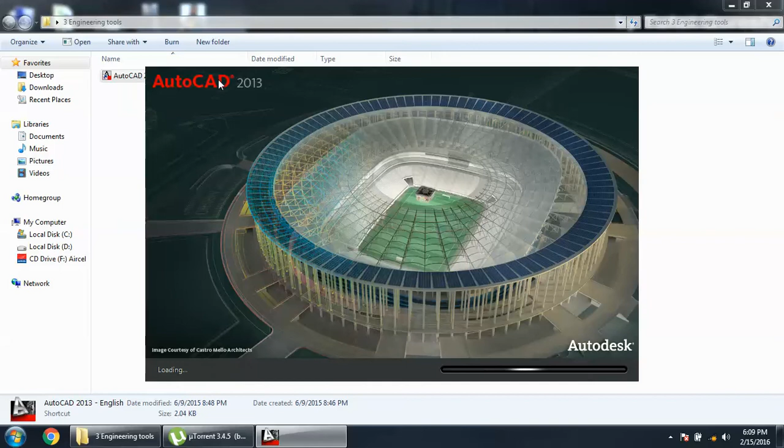Today we're going to design a 33 kV pin insulator, a very rough design, not accurate, just to give an idea how we can proceed. We know a 33 kV pin insulator has three insulating discs stacked on top of each other, and then there's a top groove which holds the ACSR conductor.

So first of all, when we open AutoCAD, it will be in a two-dimensional mode, 2D mode. So we go here in the settings down below, click it, and click on 3D modeling, and it soon comes into the 3D mode. This is the 3D mode, in which we will make a three-dimensional pin insulator.

First of all, we will have to make a reference line. Before that, here is the command window. We'll type a command for the units we want to select, UN is the command for units. We click and enter, and get the different units - inches, feet, millimeters, miles. We will keep it in inches, a reasonable way, in the decimal system, in degrees for angle and length, and then we click OK.

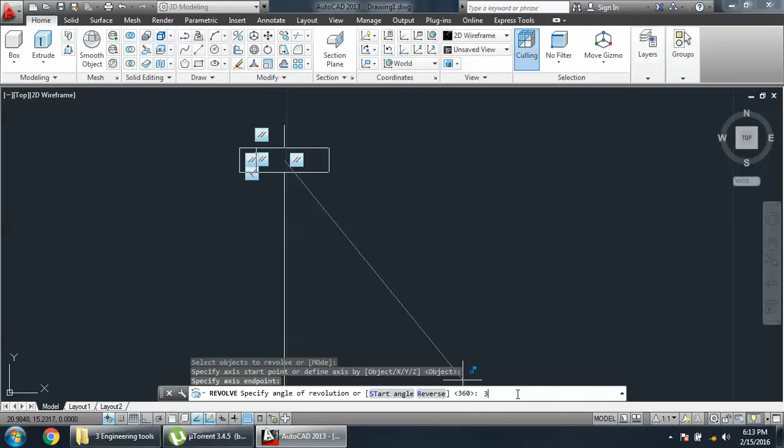After pressing enter, it will ask you to give the reference axis around which this disc has to be revolved. We click around the axis that we have already made, like this. So it will revolve, and it asks the angle, like 360 degrees. We enter 360 degrees, and this becomes a disc, a rounded disc.

So in order to visualize the disc, we go here, and here's the orbit command. We click it, and we see this is in the form of a disc. Alright, so we'll go back to the top, back to where it was.

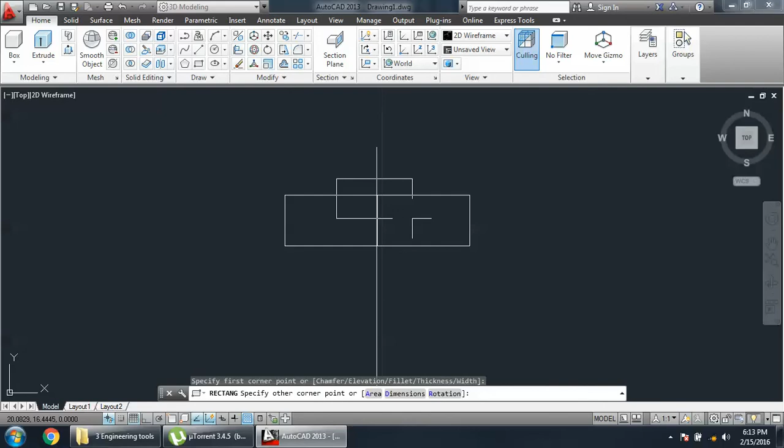In order to make a proper groove, we will cut through this disc for the grooving, to make the groove on which the conductor will rest. So we'll make another rectangular shape like this - half of it will be submerged on the disc.

We'll rotate it a little bit, get into the orthographic view a little, hold it like this. So what we'll do is go for the extrude command.

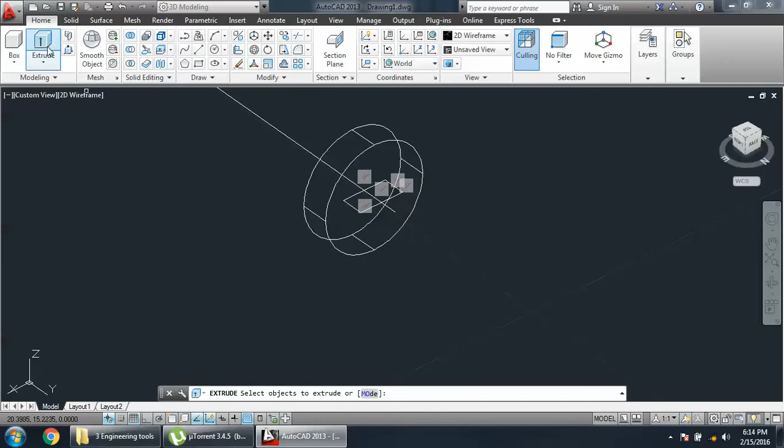This is the extrude command. Once we click extrude, we click on this object, okay, and we enter it. It will extrude outwards, project outwards.

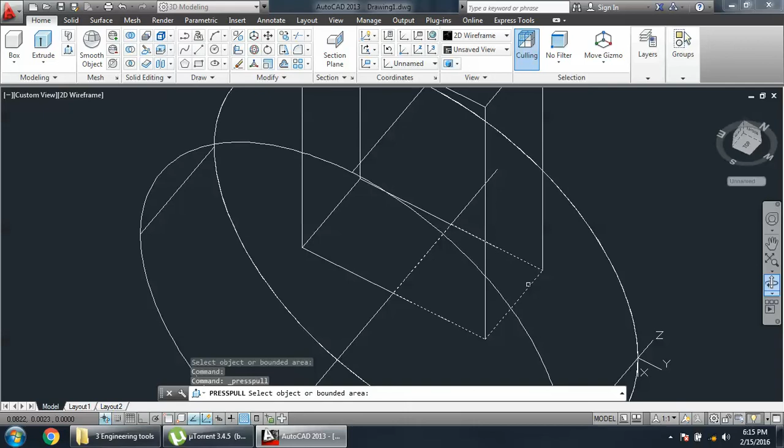Then we have another tool called press pull. What we'll do is select the particular face that we want to press pull, and move it on the other side like this. So we press pull at this face - here we go, it's not getting selected right now. Okay, no, we want to select this for press pull. It goes out, projects out, and then again we select this surface - yeah, like this surface should get selected.

Okay, this surface gets selected and it goes out of this. So what we have to do is subtract, in order to make the groove, we have to subtract from the whole disk this portion that goes through and cuts across the disk. It's a solid disk, so in 3D.

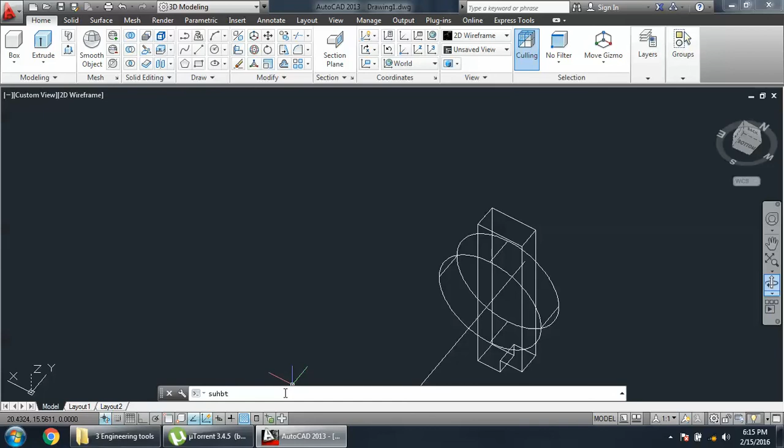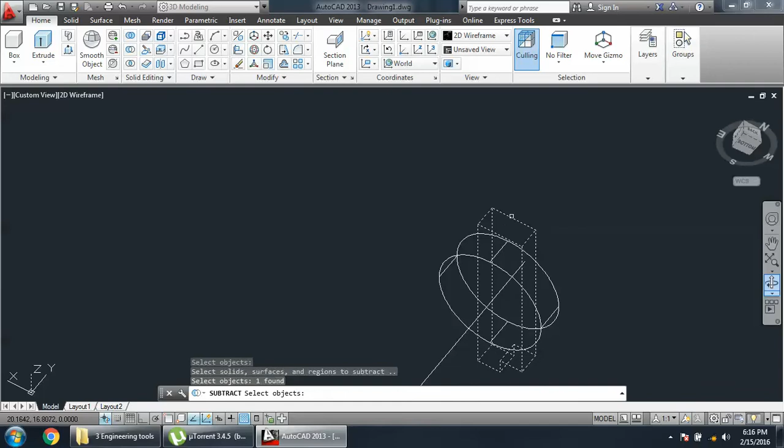So what we'll do is type the subtract command, and we have to subtract from this disk this portion, and we will enter. Let's see again, subtract. We type the subtract command. We will have to select the object, and from this object we will select this object and press enter, and so this groove is done, on which the conductor would be resting.

So we'll keep it again straight around the reference line. Now what we have to do is make the discs underneath it. So we make the insulating parts underneath it. What we will do is select the straight line. It will be somewhat like around this, depending upon the design, and then it will go a little downwards.

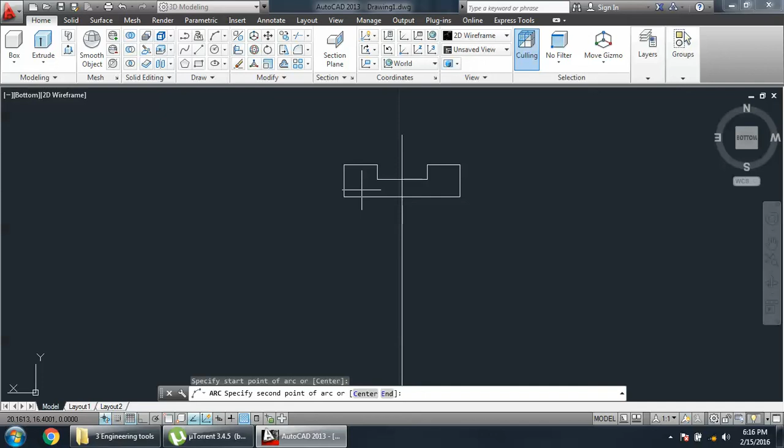Here we select the arc. Arc is here because it's shaping downwards, it's arcing. So it's an arc actually. What we'll do is select a point here, then the next point here, and then it will be a downward arc. This is a downward arc.

And then what we do is make those grooves underneath those insulators, for increasing the creepage distance. What we do is use a command called the spline command. It makes curvy surfaces. So we click here, then here, then here, and you can see the curved surfaces are forming.

Depending upon how you want them to be, we're just making a rough approximate shape. Here we go. Okay, we end it here. So what we do is join these by straight lines, because inside of this insulator there is hollow space for the pin to hold.

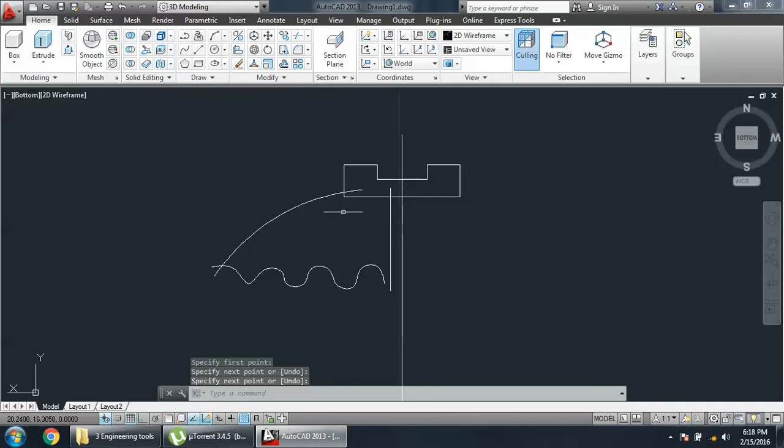For the pin to go inside, we have to keep it hollow. So we go like this and we enter. We keep the snapping on in order to join this line with the top of this line. This will join the top of this line.

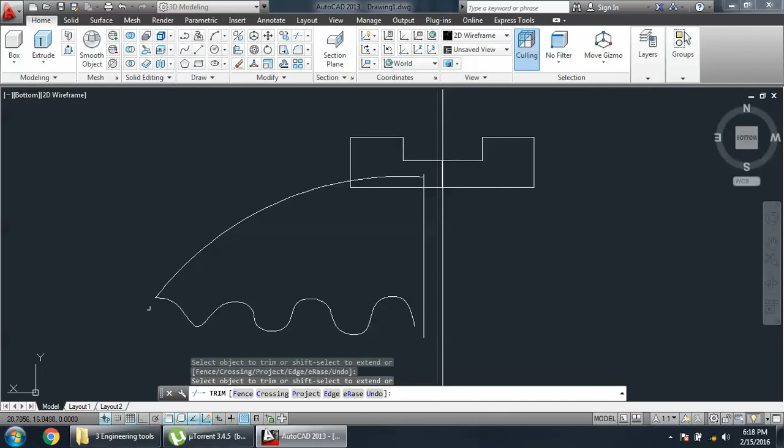And we have to trim these lines to get it proper. So we type the trim command and double enter it, and then we'll see these are joined. We'll go further up, cut this, and also extend this curve. We'll escape and just click on the curve and go slightly here. We click enter and then trim both, trim this all, double click, and there we go.

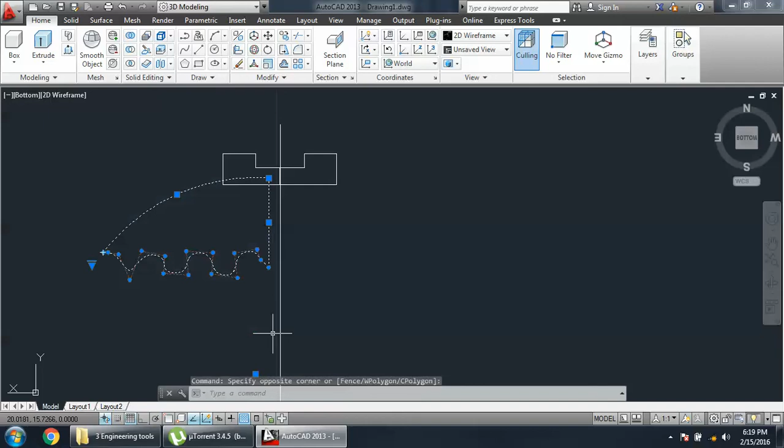Now what we have to do is make it a single block, in order to be able to revolve it around a single axis. What we'll do is select it, all of them are selected, and then type a command called the join command. The join command will join all these two-dimensional lines into one figure. So this is a single figure and we have to revolve it around in order to make it into a disk form.

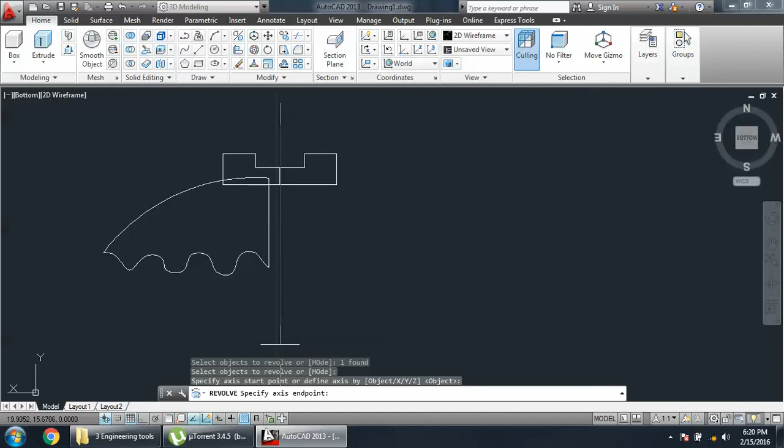So what we'll do, again, the revolve command, revolve, okay, enter. It will ask you to select the object that needs to be revolved. We'll select this disk and enter again, and then it will ask you to select the axis around which it has to be revolved. Remember, this is the cross section, so we will select the same axis around which we made the disk earlier. The same axis is selected, and then you enter the angle, how much you want to revolve it. We want to revolve it full 360 degrees, so this would make the disk.

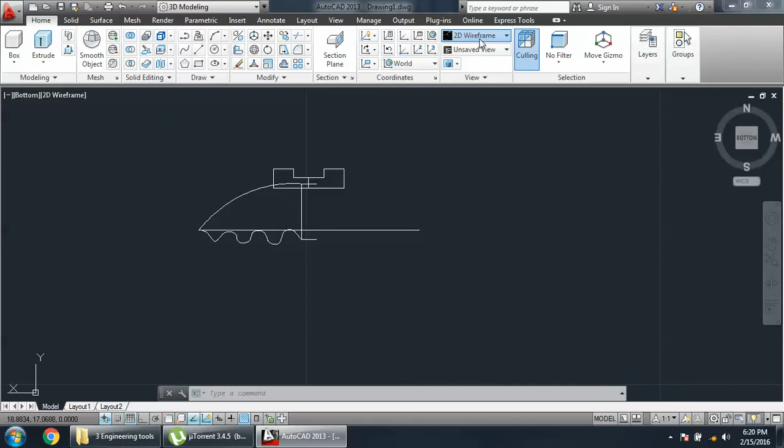So this is your first part of the disk, and you will see, after we delete the reference line, how wonderfully it has revolved. It's in the 2D wireframe view. We'll click it and then go into the realistic view. So this will be an approximate disk that will be formed, as you can see.

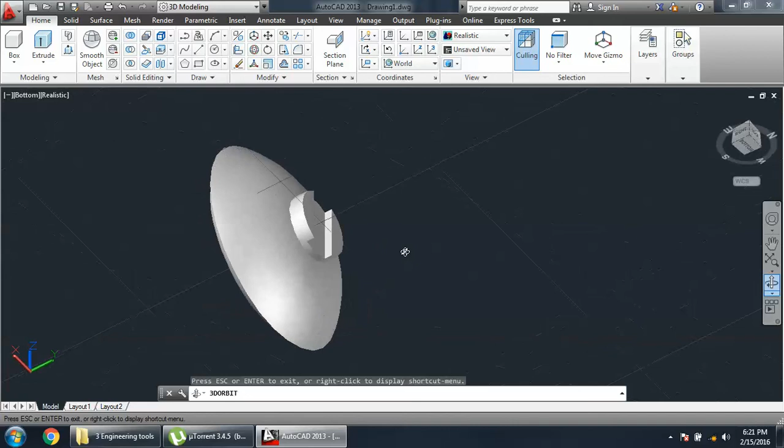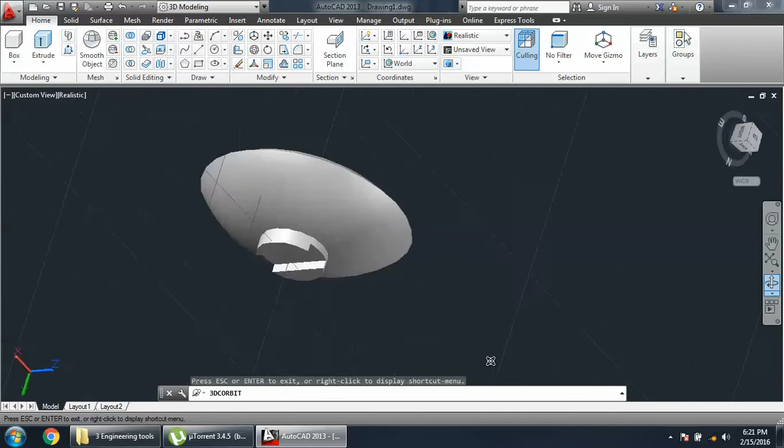So this is an approximate basic tutorial to make a 33 kV disk insulator, and then we can stack 3 disks on each other in order to make a disk of different voltage levels. It's not necessarily 33 kV, but of different voltage levels we can make pin insulator devices. Go in a continuous orbit, and that will give you a fairly good idea about the making of this.